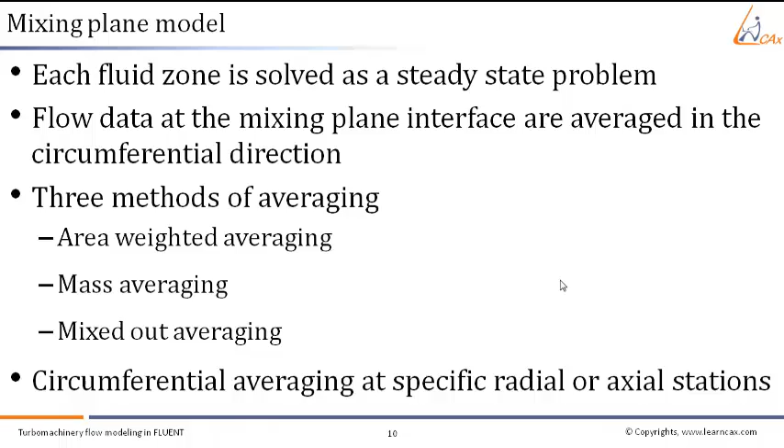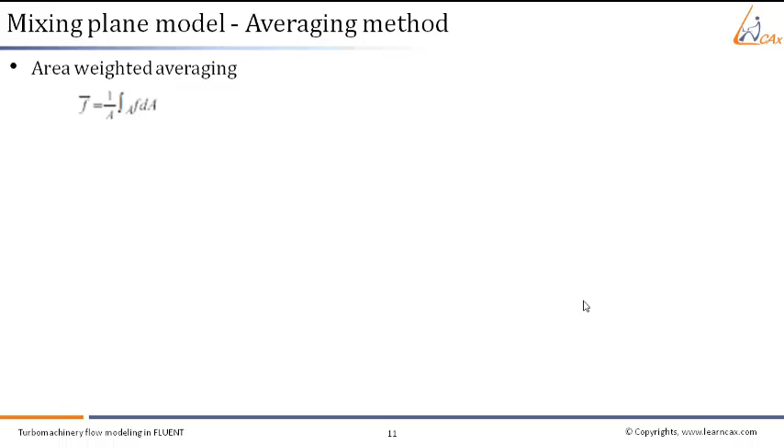Similarly, profiles of static pressure and direction cosines of flow angles in the radial, tangential and axial directions are computed at stator inlet and used as boundary conditions on the rotor exit. Let us review the averaging methods now. First is the area weighted averaging. In this, Fluent takes a simple area weighted average of the variable to be transferred across the interface. The formula for area weighted average is shown here.

The next is the mass weighted average. In this, a mass weighted average is taken for the variables to be transferred across the interface. This method provides better representation of flow quantities than the area weighted average, but it may cause some convergence issues if reverse flow is present.

The third method is the mixed out average. This method is based on the principles of conservation. It is considered to be a better representation of the averaging as it also reflects losses associated with non-uniformities in flow properties. It considers the equations as shown in this slide. So there are mass, momentum and energy conservation equations which are solved for mixed out averaging.

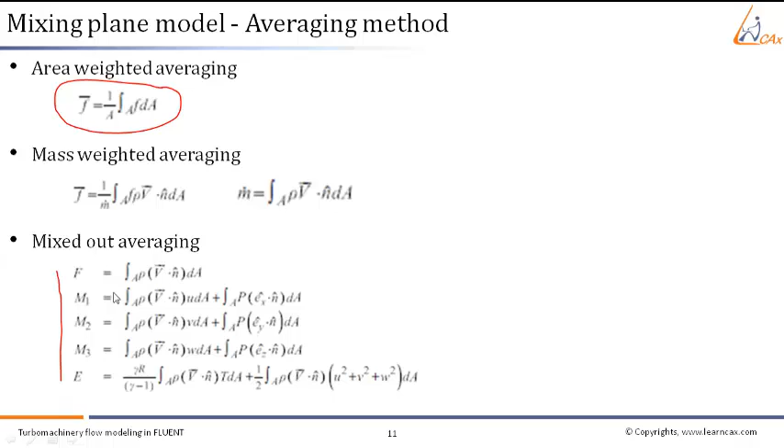What is the algorithm on which the mixing plane method is based? Let us see one by one the algorithm steps in this flow chart. First, the mixing plane method updates the flow field solution in the stator and rotor domains. Then the average of flow properties is taken at the rotor exit and stator inlet boundaries. By this, we get profiles for use in updating the boundary conditions. Then the profiles are passed to the boundary condition inputs required for the stator inlet and rotor exit. Steps 1 to 3 are then repeated until convergence is achieved.

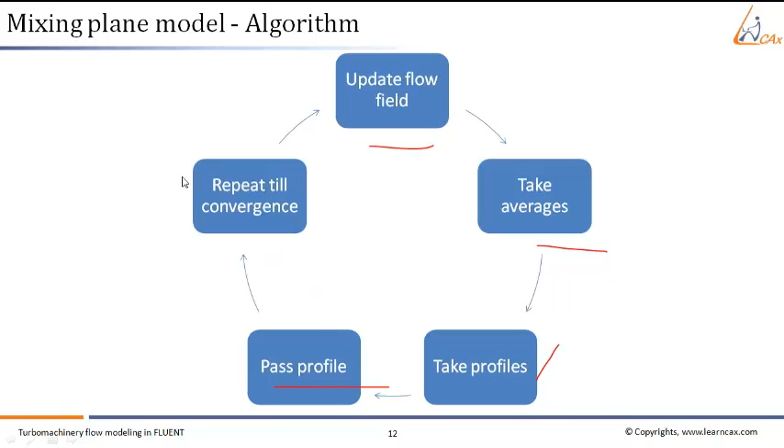After we have seen the conceptual background behind the mixing plane model, let us go into detail of the MRF model. A pictorial representation of the application of the MRF model is shown here, in which we have the stationary zone, that is the outside zone, the rotating zone which is the inside zone, and the interface which is the dashed line.

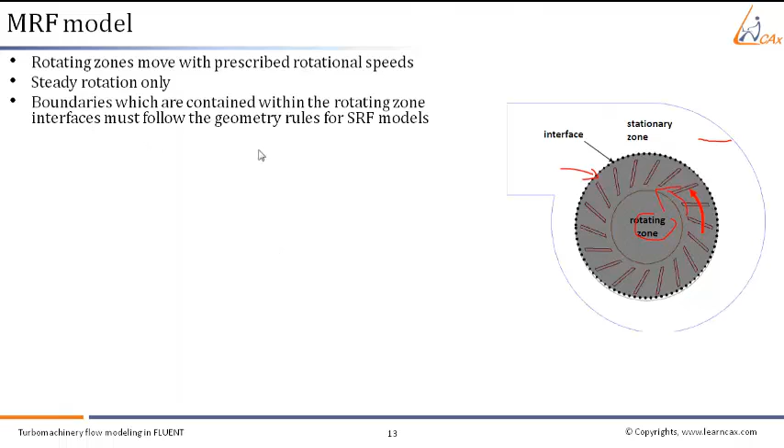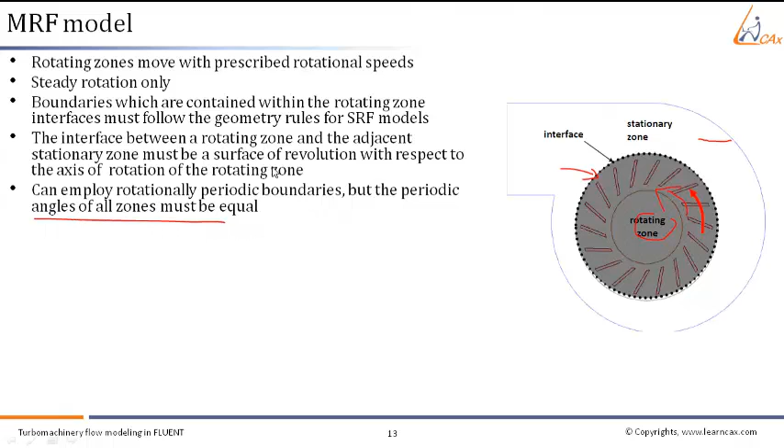Rotating zones move with prescribed rotational speed. Only steady rotation is considered. Boundaries which are contained within the rotating zone interface must follow the geometry rules for the SRF model. That is, the typical rule that the interface must be a surface of revolution has to be followed. Also, we can employ rotationally periodic boundaries, but the periodic angles of all zones must be equal. Surface of revolution is another important condition.

The biggest thing to worry about in the MRF model is where to place the interface. For interfaces contained within enclosed systems, we choose the radial position midway between the tip of the rotor and the closest stationary wall as the interface location. For an interface embedded in a large domain, we choose the location where the flow conditions are relatively uniform. So relatively uniform flow conditions, midway between the rotor tip and the closest stationary wall, is an ideal location, and we have to avoid cross flow situations when we place the interface.

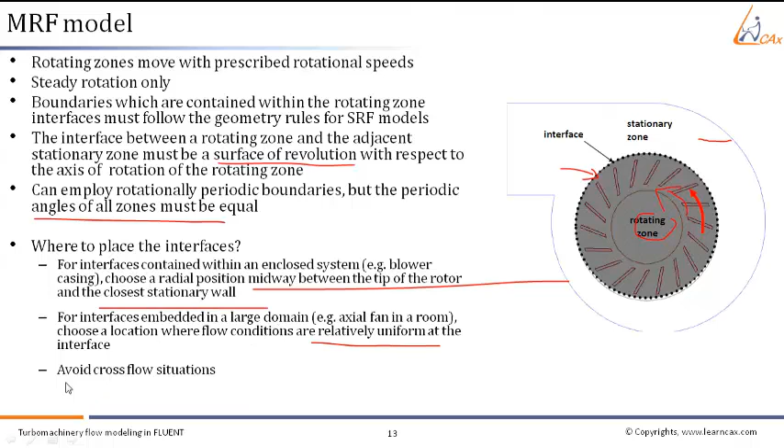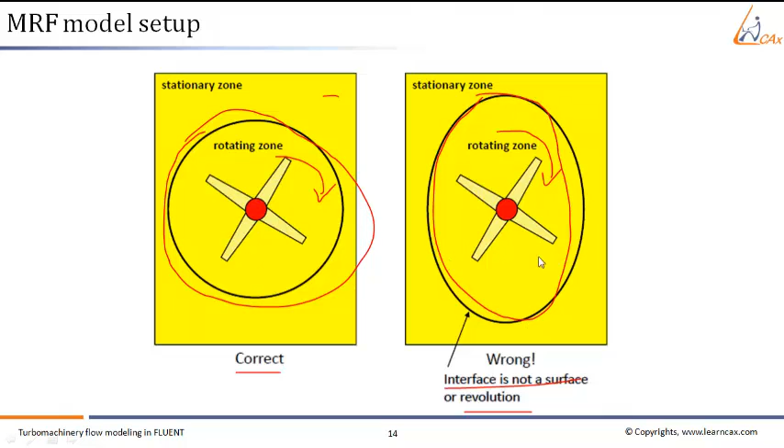An example of the location of the interface is shown here. We are choosing the same problem, and in this case the rotating zone is the inside zone. In both cases we have the stationary outside zone. This selected interface seems to be correct, and in the second case the interface is not a surface of revolution, so do not select a shape like this which is not a surface of revolution about the axis of rotation. Now let us study the interface types in detail.

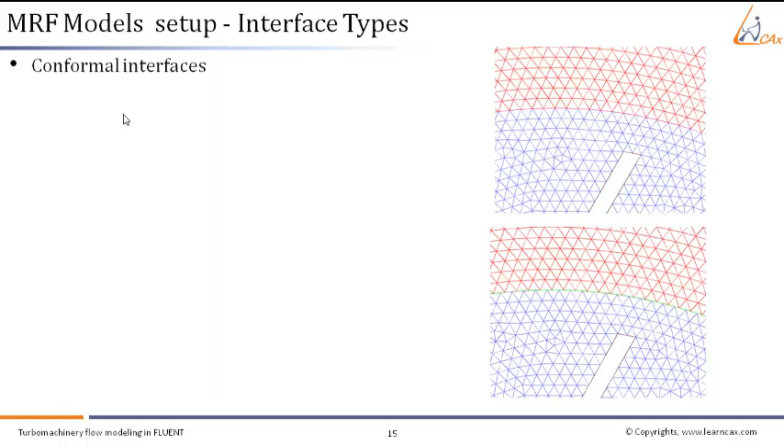Two mesh setups are available. If the boundary between two zones which are in different reference frames is conformal, there is one interface type, which is conformal interfaces. By conformal interface we mean that the node locations are identical at boundaries where the two zones meet. In such a case, we can create the mesh as usual with all cell zones contained in the same mesh file.

We have to keep the different portions of the domain in different cell zones whenever we want to assign a different reference frame for it. Interior zone condition for the boundary between reference frames: if the boundary between two zones that are in different reference frames is non-conformal, it is known as a non-conformal interface. This means mesh node locations are not identical at the boundary where the two zones meet. In this case, we have to follow the creation of non-conformal mesh procedure.

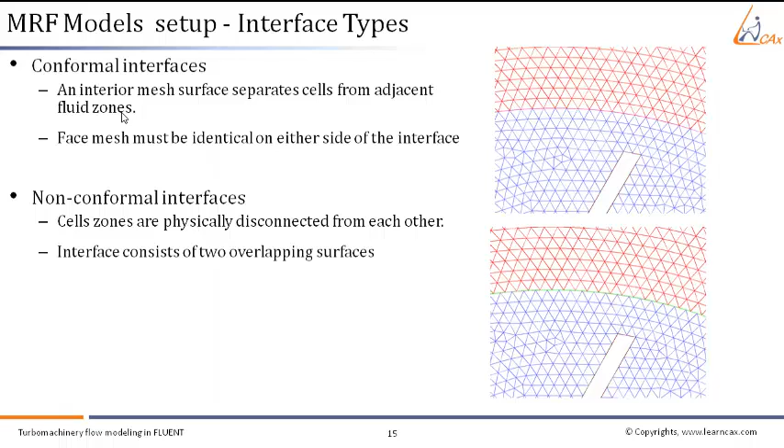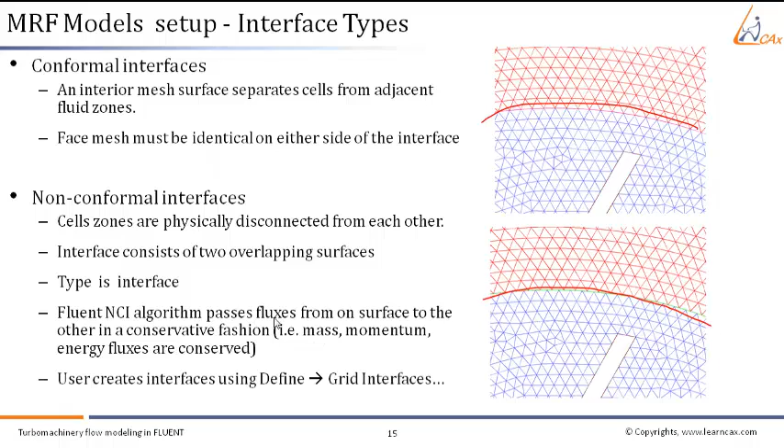The interface consists of two overlapping surfaces, type is interface, and a Fluent NCI algorithm passes flux from one surface to the other in a conservative fashion. So this is a particular example where the interface is conformal here, but in the second case, the interface is non-conformal. To create the non-conformal interface, we have to go to Define, Grid Interfaces.

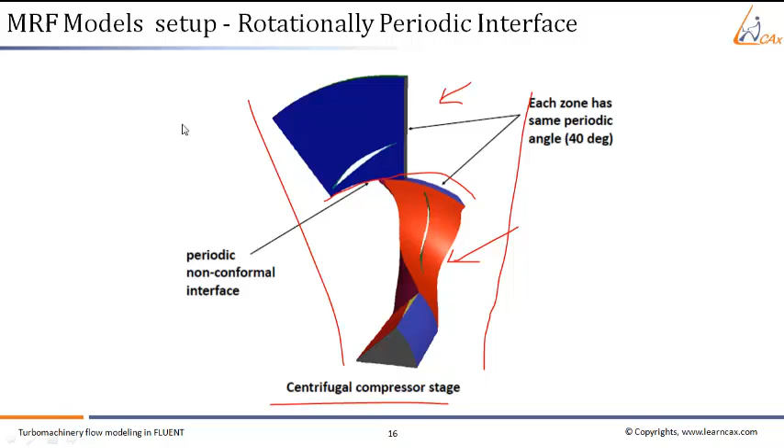An example of a rotationally periodic interface type is shown here, where we have a periodic non-conformal interface. Each zone has the same periodic angle, that is 40 degrees, and we can model the stator and the rotor zone. Instead of modeling the entire centrifugal compressor, we are only modeling a stage of it, and this thing repeats or is periodic.

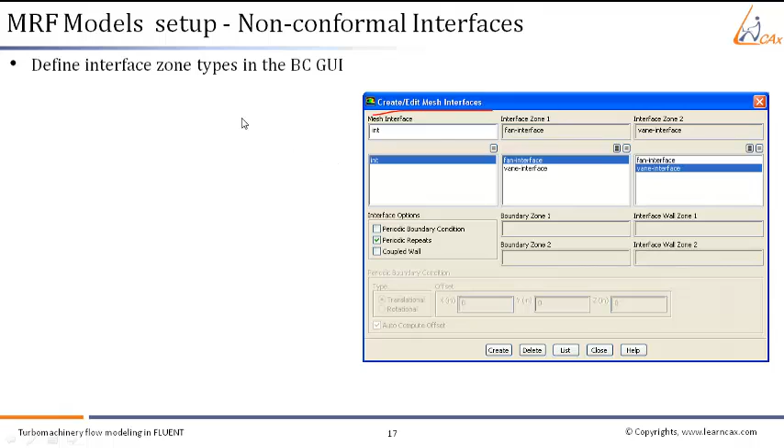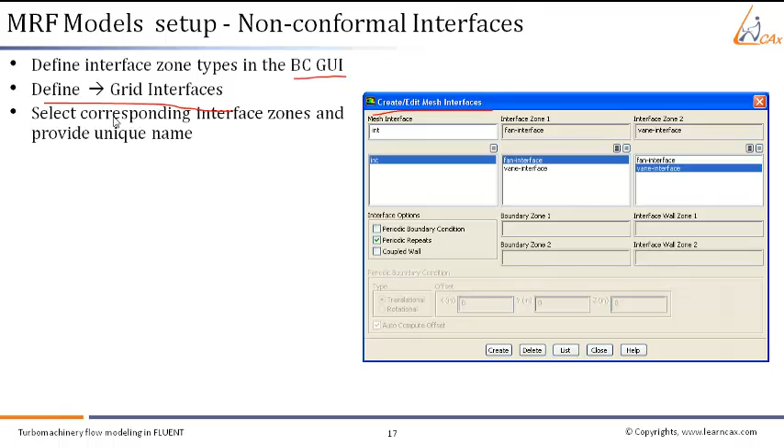Now let us see how to set up the non-conformal interfaces, which is the next step in setting up the MRF model. We have to go to the create/edit mesh interfaces, that is the Define Mesh Interface command or option. We have to define the interface zone types in the boundary condition GUI. We have to go to Define Grid Interfaces after that. Then we select corresponding interface zones and provide a unique name.

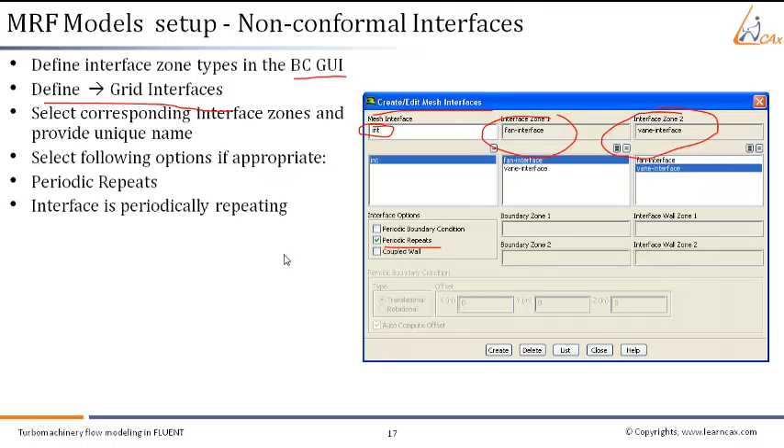So this is the name that we provide for the mesh interface, and then we select interface zone 1 and interface zone 2. We can select options like periodic repeats; in this case, the interface is periodically repeating. Coupled wall option: in this case, the interface is a solid wall. An example can be between a fluid zone and a solid zone, or two solid zones.

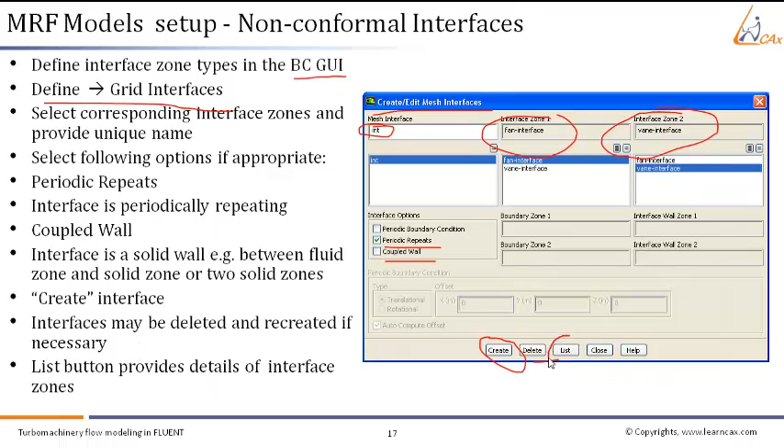And then we press Create interfaces. An interface may be deleted or recreated if necessary by using these options. The List button, which is available here, provides details of interface zones. We have to generate a mesh with appropriate stationary and rotating fluid zones.

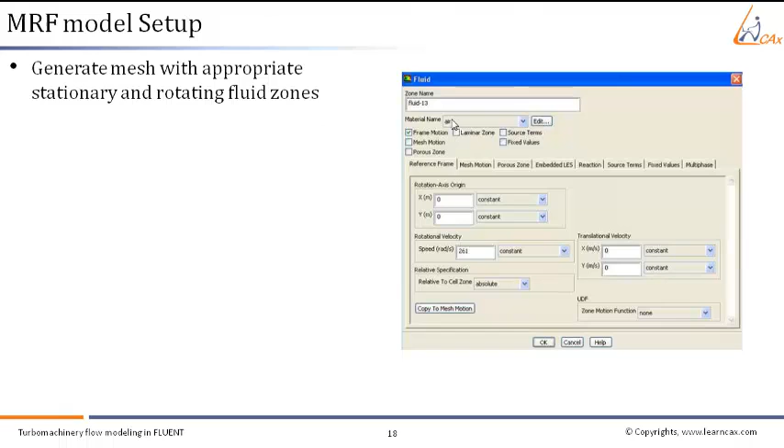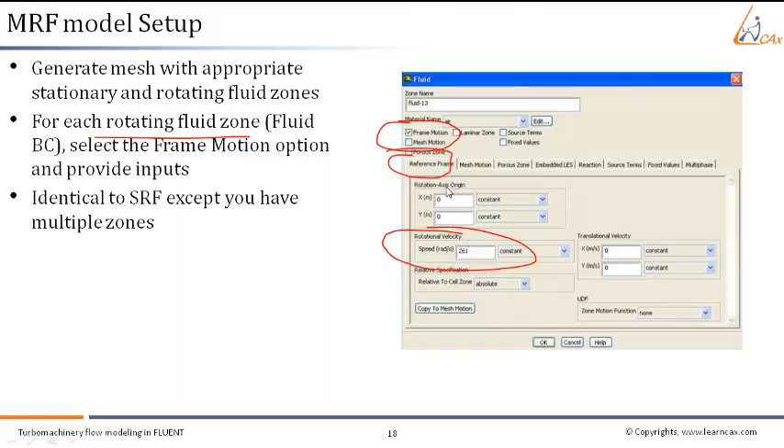For each rotating fluid zone, we select frame motion as an option in order to activate the multiple reference frame model, and the reference frame tab opens up. The setup is very similar to the SRF model, except we have multiple zones. So we have to specify the rotation axis origin, the rotational velocity, the rotational axis direction, and whether there is a translational velocity. We can also hook up the zone motion function by UDF.

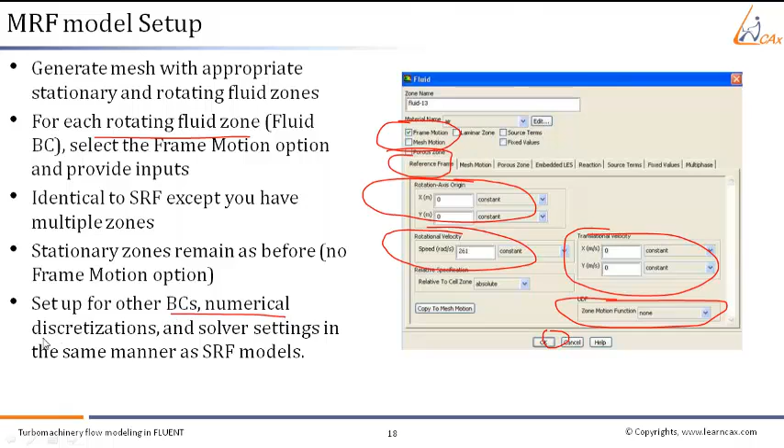Once we set up all these conditions for the rotating reference frame zone, click OK. After this, we set up the other boundary conditions, numerical discretization and solver settings in the same manner as the single reference frame model. And then the last step is to initialize our solution and run the calculation by pressing Calculate.

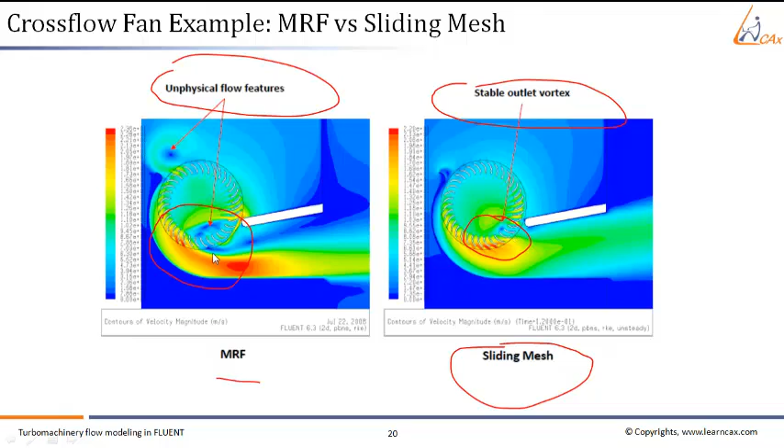So when you solve the MRF model, if you are seeing fluctuating residuals, this means that the case might be inherently unsteady, and you have to switch to the sliding mesh model instead of showing the results of the MRF model, which can be misleading and give unphysical flow features.

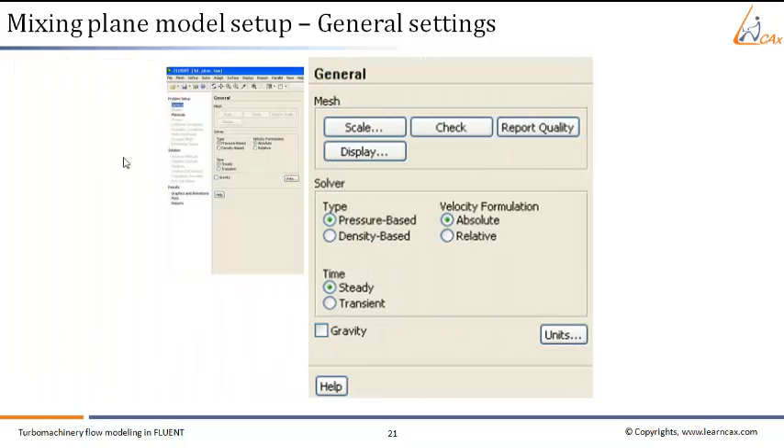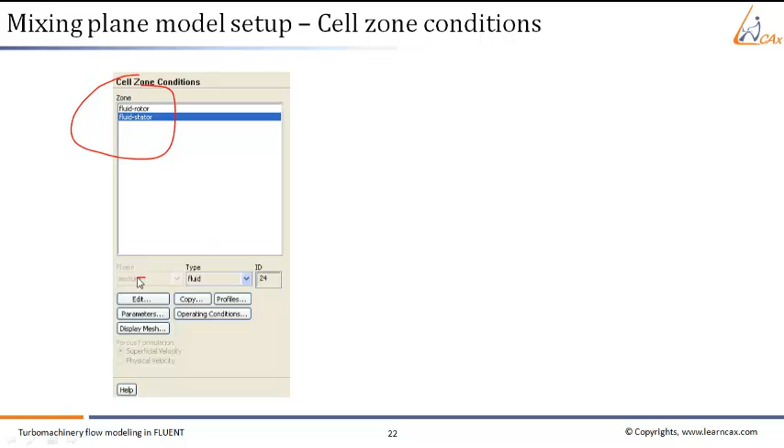Now let us see what is the setup for the mixing plane model. First, we need to select either the absolute velocity formulation or the relative velocity formulation in the general settings, which you access from here. Then we go to cell zones and press Edit. Here we specify cylindrical velocity or flow direction components, that is, we specify frame motion. Then we can specify in the reference frame what sort of velocity specifications we need.

We will need to define the axis of rotation for the reference frame. Then in the fluids panel, we also specify the rotation axis origin and rotation axis direction under the reference frame tab. Then we define the velocity boundary condition.

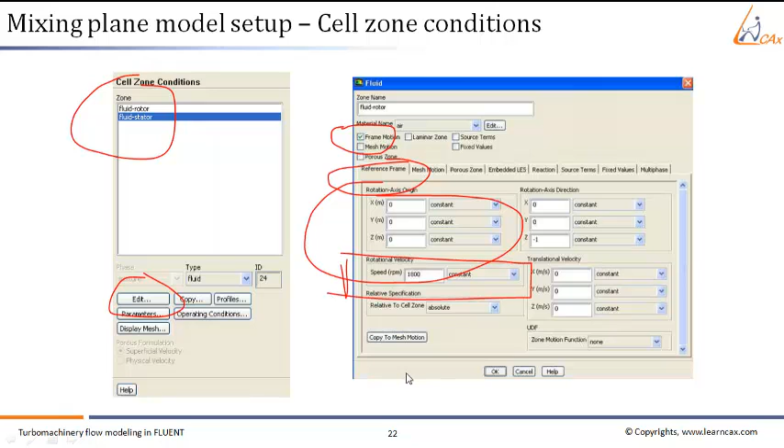Here we specify the two zones that comprise the mixing plane by selecting an upstream zone in the upstream zone list and a downstream zone in the downstream zone list. Then we indicate the geometry of the mixing plane interface by choosing one of the options under mixing plane geometry. So we can choose radial or axial.

A radial geometry signifies that the information at the mixing plane interface is to be circumferentially averaged into profiles that vary in the radial direction. This is appropriate for axial flow machines. An axial geometry signifies that the circumferentially averaged profiles are to be constructed that vary in the axial direction. This is true for radial flow devices.

After this, we set the number of interpolation points. This is the number of radial and axial locations used in constructing the boundary profiles. For circumferential averaging, the number should be chosen such that it is approximately equal to the resolution of the surface mesh in the radial or axial direction.

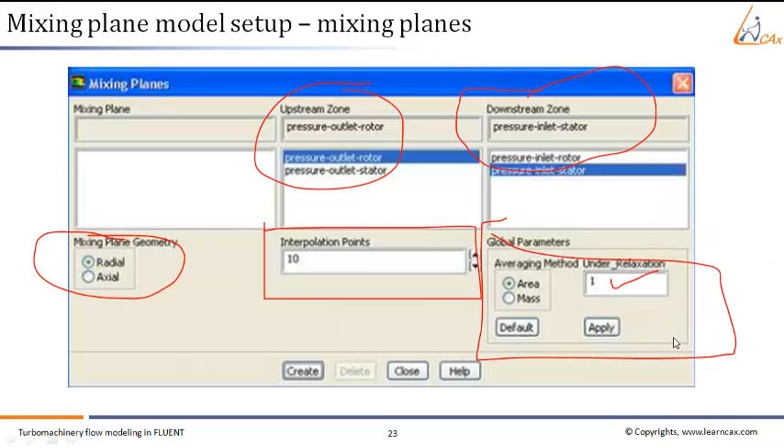Then we go to the global parameters. Here we specify the averaging method. The choices are area averaging, mass averaging, or mixed out method. There is also an option to under-relax the changes in the boundary values at the mixing plane. This can be done by setting the under-relaxation parameter. After setup, we need to click on Create to create a new mixing plane.

Then comes the last step. In order to run the mixing plane problem, we have to set up whatever boundary conditions remain. For example, in wall, we have to go into the momentum tab and click on moving wall. If the wall is moving, as usual, we give it in absolute frame. If the wall is stationary, we give absolute frame 0.

If the wall is rotating, we give it in relative frame. It is having 0 speed, which means it is rotating with the relative reference frame velocity, and in reality it is actually rotating. We also give no slip or specified shear conditions as well as wall roughness.

After boundary conditions, we set up the solution methods here, whether we have the pressure velocity coupling, what type of spatial discretization algorithms we can use, and we finally initialize the solution, and then we click on calculate in order to start the calculations, which completes our mixing plane setup.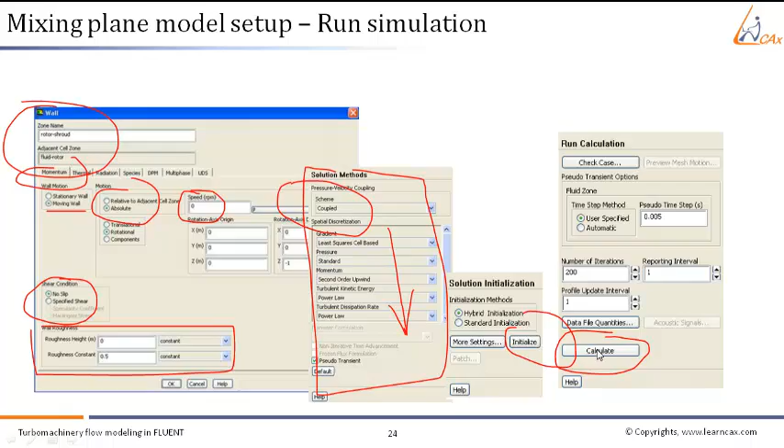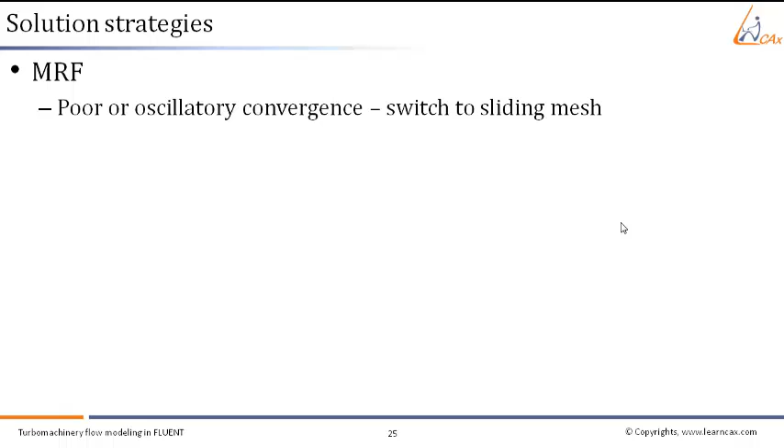Let us see what are the solution strategies applicable to the multiple reference frame and the mixing plane model. In case of multiple moving reference frame, there is a possibility of interaction between the moving and the stationary components, which can sometimes be seen as a poor or oscillatory convergence. In such cases, it is strongly recommended that the sliding mesh approach be used to compute the flow field in order to resolve the unsteady interaction.

In case of mixing plane model, if there is significant reverse flow, then the mixing plane model may not be appropriate. In some simulations, there is reverse flow during the start of the iterations, even though at convergence there is no reverse flow. In such cases, we first have to obtain a provisional solution using fixed conditions at the rotor-stator interface. There may be some convergence problems with the mixed out method. So first start with the area averaging method and then switch to mass or mixed out averaging method. It is also recommended to use the under-relaxation parameter to get stability in the simulation.

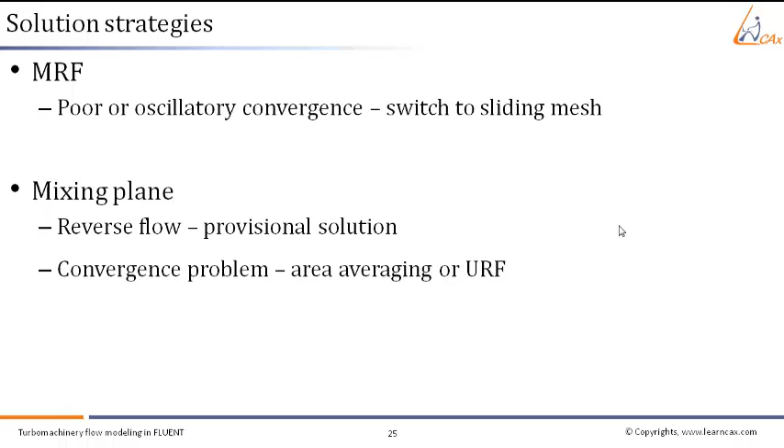Finally, we see some of the post-processing details. Again, there are various post-processing options for MRF and mixing plane model. We can plot contours and vectors of velocity, relative velocity as well as absolute velocity. These are contained in the velocity categories.

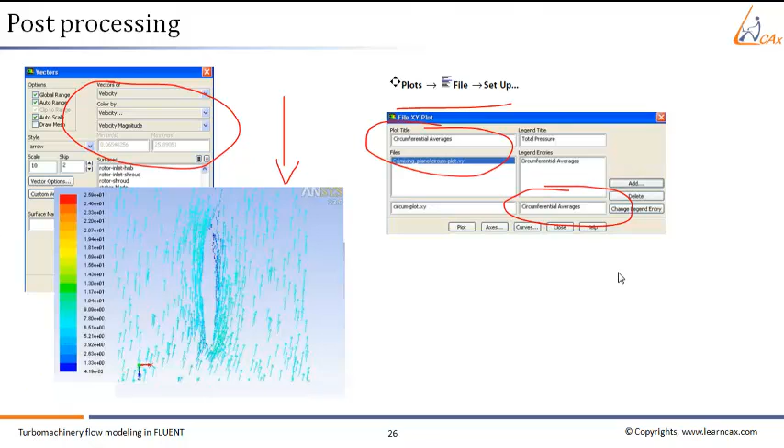In case of mixing plane model, you can also generate a plot of circumferential averages. This can be done by going to plot files setup. We select circumferential averages as the plot title, and we can select legends as well as circumferential averaging. This will allow you to find the average value of a quantity at several different radial or axial positions in your model using the circumferential averages plots. So this type of plot can be generated using this particular option.

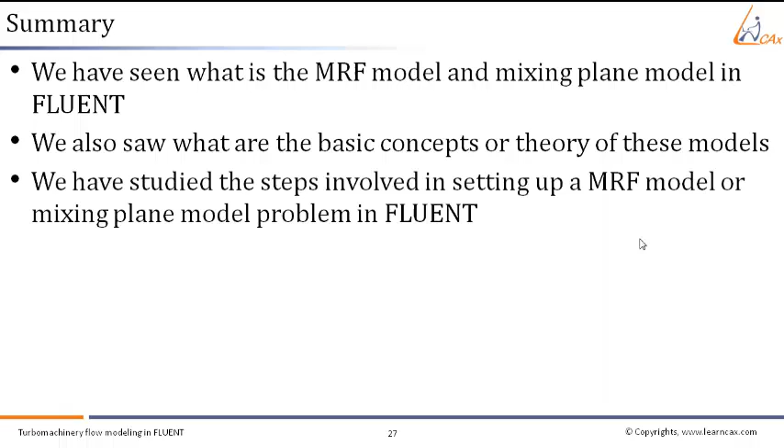So finally we come to the end of this particular session on the multiple moving reference frame and the mixing plane model. We have seen what is the MRF model and the mixing plane model in Fluent in this session. We also saw the basic concepts or theory of these models. We have studied the steps involved in setting up the MRF model or the mixing plane model in Fluent. In the next session, we will see the sliding mesh or the dynamic mesh model, which will be the last lecture of this particular course.